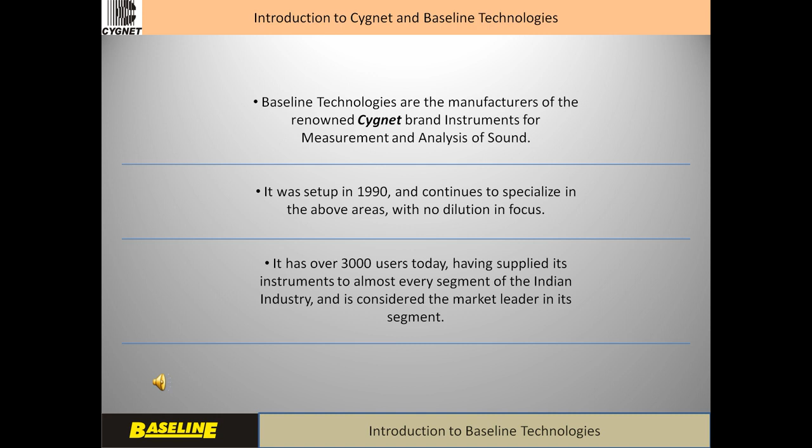Sound is pulsations of pressure which propagate through air or any other fluid as a wave and are incident on our eardrum to cause auditory or hearing sensation. An excess of exposure to sound can harm our hearing ability and cause permanent hearing damage. It differs from vibration only in the sense of the medium that carries the oscillations. If the oscillations propagate through a solid, then it is termed vibration, and if it propagates by the movement of air or any other fluid, it is termed as sound.

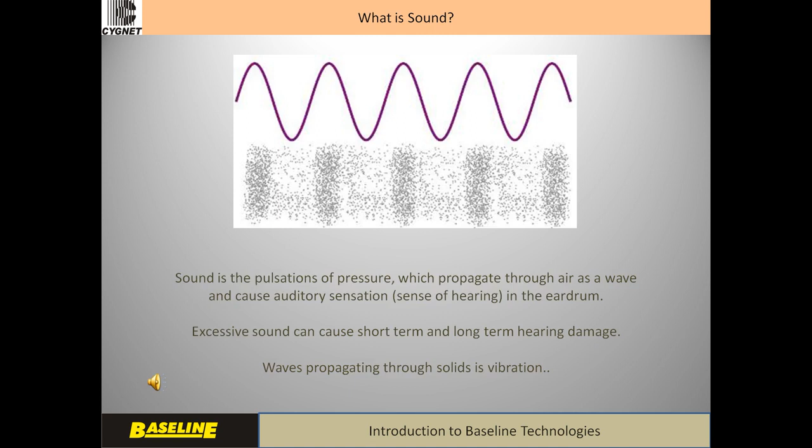The measurement of sound assumes importance as the human ear has a finite response and the magnitude of the oscillations of the air pressure needs to be measured to determine its psychoacoustic effects on the human brain. Environmental noise has important public health consequences, and thus the government regulates the levels of sound permitted in different areas through the Environmental Protection Act and the Factories Act. Conformance to law requires accurate measurement of sound.

The government is becoming increasingly serious about implementing the law, and violation of the EPA is considered a criminal offence in India. Manufacturers of equipment also like to specify limits to sound emitted by their products in order to be more acceptable to their customers.

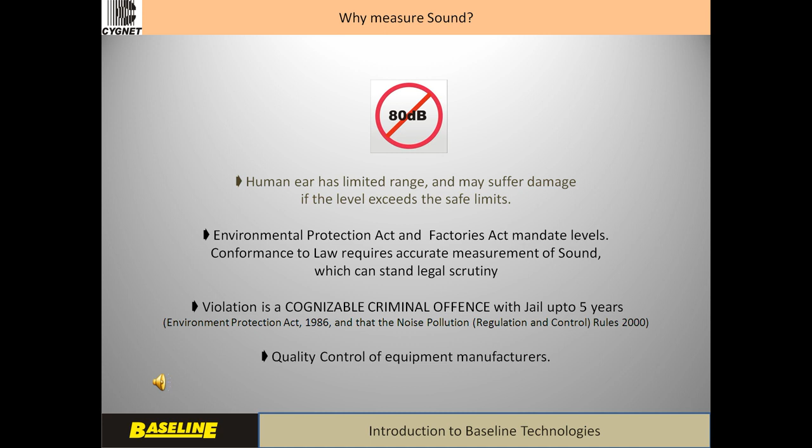Sound is measured in terms of SPL or sound pressure level. Being an alternating quantity, it is essential to compute the root mean square of the oscillating pressure level. The dynamic range of the human ear is astounding, almost a ratio of 1:10 million. This is the ratio of the minimum perceivable threshold of sound to the maximum level that can be tolerated by the human ear. Due to the enormous range of these figures, a logarithmic scale is preferred, which yields easy-to-handle numbers.

The measurement of sound is conventionally ratiometric and not absolute. It is 20 times the log of the ratio of pressure and a reference level which is defined as 20 micropascals. This is 0 decibel and is practically unachievable in real life. Real levels which the human ear can perceive are around 25 to 30 dB. Sound pressure level in decibels equals 20 times the log of the ratio of sound pressure to 20 micropascals. Thus, 94 dB is almost equal to 1,000,000 micropascals or 1 pascal. A 3 dB change represents a doubling of SPL. 20 dB is 10 times.

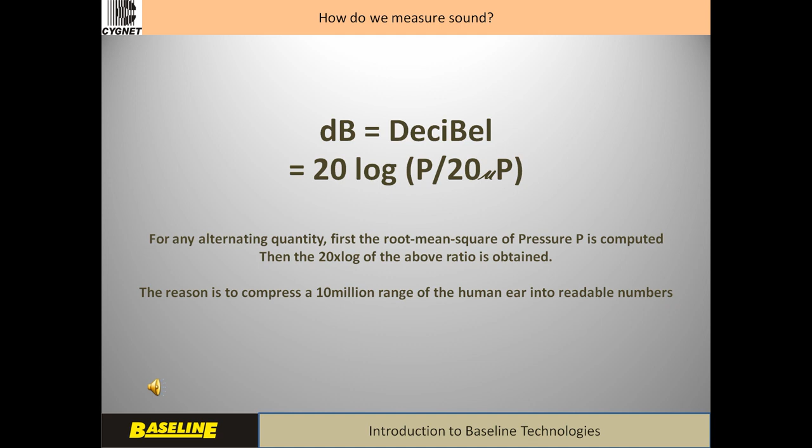The human ear responds differently to different frequencies as it has a response of approximately 20 Hz to 20,000 Hz. Thus, the effect of the same sound pressure level at very low frequencies and that at very high frequencies is considerably less than that at intermediate frequencies. The human ear follows a certain response curve with frequency. This curve has been standardized by the World Body of Audiometrists, RIAA, and the same is adopted as a standard average human ear frequency response curve.

A measuring instrument is designed to weight the signals from a linear microphone type sensor according to different frequencies and convert it into an inverse form of the RIAA curve such that the output signal represents the ear response more effectively.

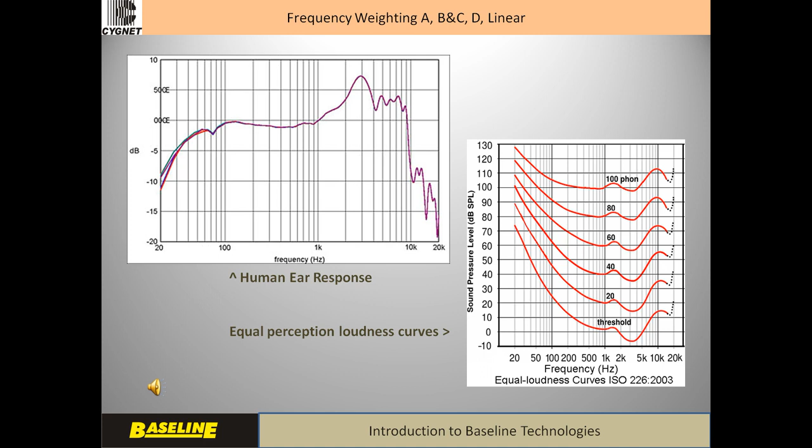Such a curve for moderate levels is called the A weighting curve, and the resultant readings are represented as dBA. A-weighted readings represent the response of the human ear at moderate levels and thus is the most preferred measurement parameter across the world today. For higher levels of sound, as encountered in airports, etc., the curve is slightly different and is referred to as C weighting, though this is not very often used in normal practice.

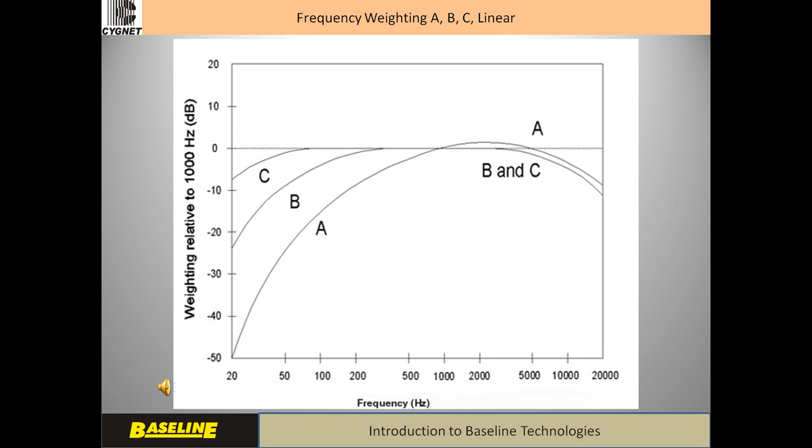While computing the root mean square of the sound waves, the applicable standards define various averaging times such as slow, fast, and impulse. Of these, slow is most often used. Slow, as defined in these standards, has a time constant of 1 second, and fast has a time constant of 125 milliseconds. There is also an impulse time constant, which is 35 milliseconds on the rising level and 1.5 seconds on the falling level. Impulse is useful for banging sounds like Diwali crackers, etc.

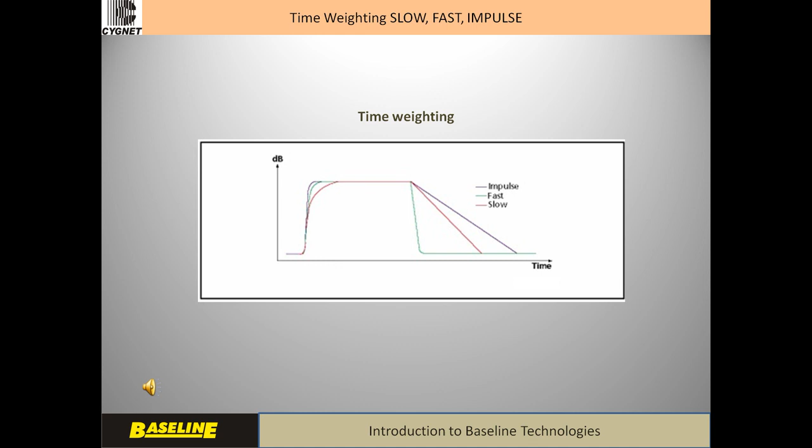Environmental sound, being a randomly varying quantity, needs to be averaged over a finite period of time in order to yield a single representative number of the varying quantity. If the sound has to be assessed over a long period of time extending to several minutes, hours, or a day, as in traffic noise, then the logarithmic average of the varying SPL is called LEQ. LEQ is often necessary for monitoring of environmental sounds over a period of time.

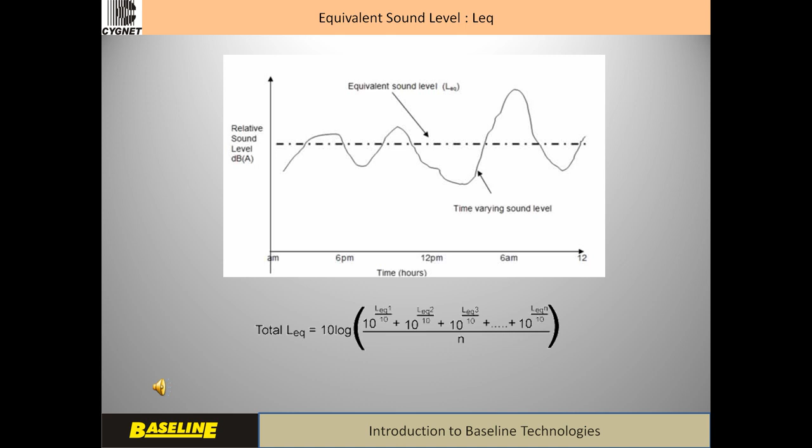SEL, which stands for Sound Exposure Level, is a figure which combines the sound level with the time period over which it is occurring. It is typically used in event-based sounds like a train pass by or an airplane flyby. SEL units are also dB, and it is the sum of LEQ in dB and 10 log T in seconds.

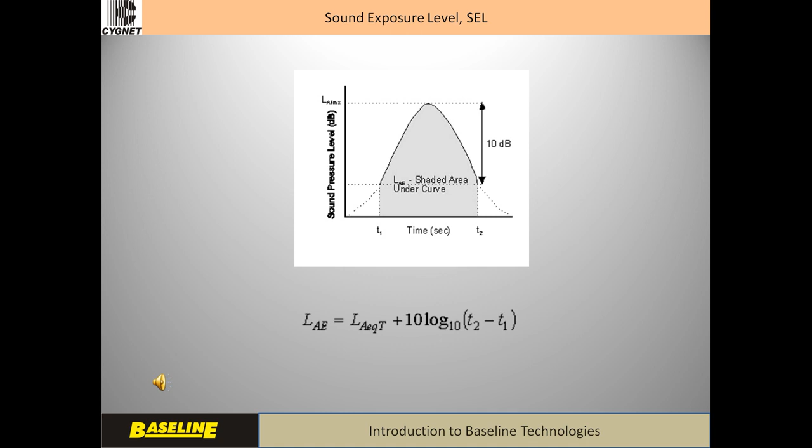This is best illustrated with an example. Suppose several readings of dB taken at fixed intervals were tabulated in decreasing order of magnitude. Then, Ln would be the reading that is obtained after rejecting the highest n% readings of the total readings. The figure which is used often is L10 or L20. This means that we take readings over a specified period of time at specified intervals and then reject the highest 10% or 20% of the readings. The L10 value is the highest of the remaining readings. Ln is often used in assessing noise generated by projects in the vicinity of residential areas like metro rail construction, etc.

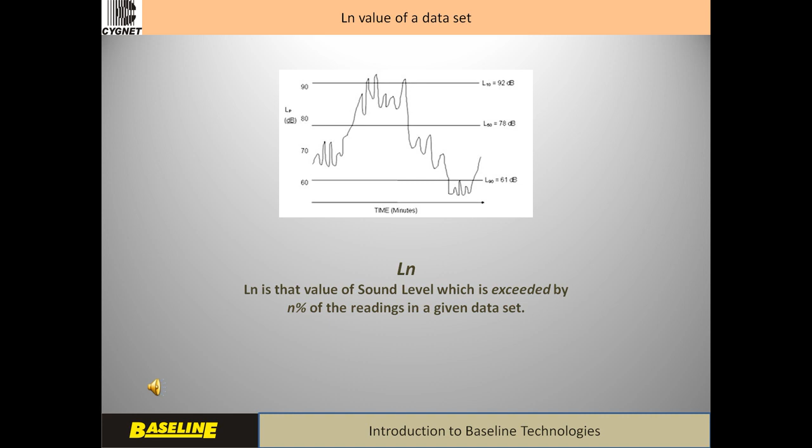Sound measurement is covered under different acts and is a legal requirement. The Environment Protection Act 1986 and rules formulated and notified in 2000 for noise pollution specify limits of dB in industrial, commercial, residential, and silent zones for night and day and require the measurement of LEQ over the period 6 a.m. to 10 p.m. as daytime and 10 p.m. to 6 a.m. as nighttime.

The instruments must conform to the Indian standards, typically IS 9779-1981 and now IS 15575. These are equivalent to IEC 61672-1. The newer standard is slightly more liberal than the older ones in terms of the tolerances permitted.

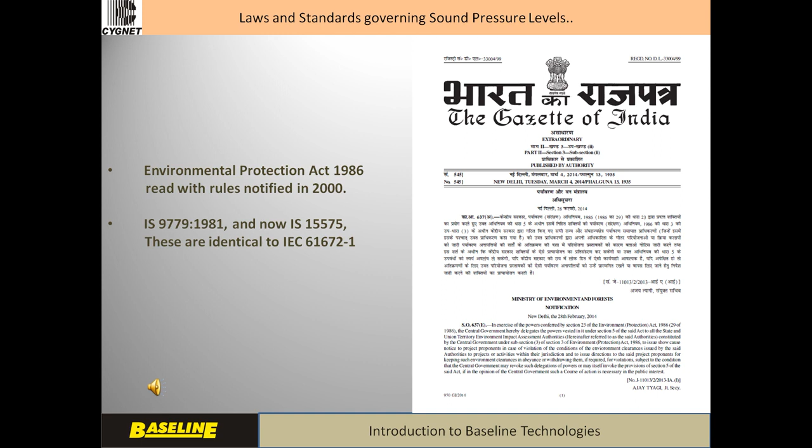These are accuracy grades defined in the Indian and international standards covering instruments for measurement of sound. Type 1 instruments are also known as precision instruments and Type 2 as commercial instruments. In order to be legally valid, an instrument must be Type 1 accuracy and it must have a valid calibration which is traceable to standards maintained by the National Physical Laboratory in New Delhi, India.

The most still of nights is typically about 25 to 30 dB, whisper is 40 dB, soft sounds such as of crickets in the night could be up to 40 dB, and a typical office would be 50 dB. A noisy party could be as much as 100 to 120 dB, and a plane taking off could be as high as 140 dB. Most firecrackers would be about 120 to 130 dB.

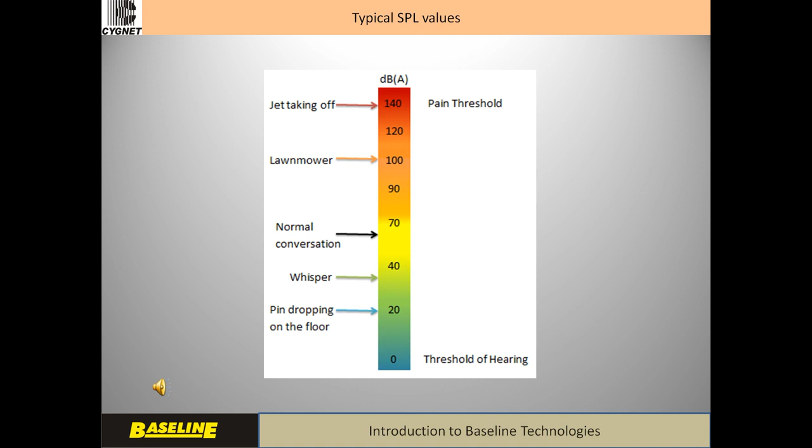Frequency analysis of sound is normally done within octave frequencies. The idea is to find out the frequency content of sound falling within a certain band of frequencies. Normally, this is done with steady sound levels, and the focus is selection or assessment of sound-absorbing materials or sound quality assessment. An octave is a group of frequencies, with the group of one band being double of the band before it. Finer analysis is sometimes performed in third octave frequencies, that is, in the geometric progression of frequencies, there are 3 bands in each doubling of frequency, thus making some 31 bands in the audio range.